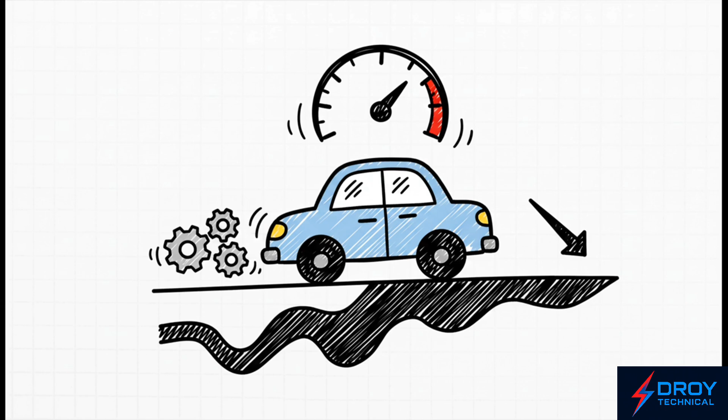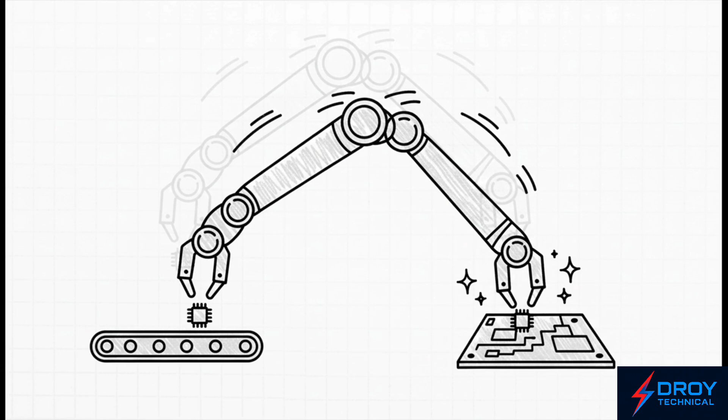Or what about cruise control? You tap a button, and boom, your car holds a rock-steady 65 miles an hour. Doesn't matter if you're going up a hill or down one. It's making these tiny, constant adjustments to the engine, way faster and more precise than you ever could with your foot. And this stuff goes way, way beyond our personal convenience.

You look inside a modern factory, and you've got these robotic arms assembling our gadgets with just incredible speed and precision. They can do thousands of these exact, repetitive movements and never get tired, never make a mistake. And you know what? All of these things are powered by the exact same fundamental principle. And that principle, the big idea for today, is called a control system.

At its heart, a control system does three simple things. It measures something, it compares that measurement to a goal you've set, and then it takes action to get rid of any difference between the two. That's it. Measure, compare, correct. That's the loop that basically runs our modern world.

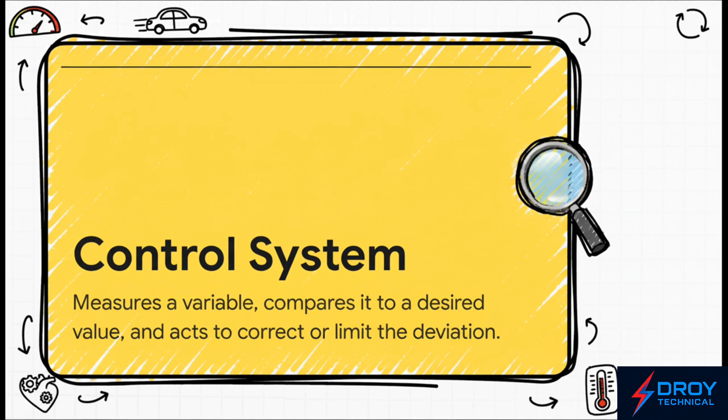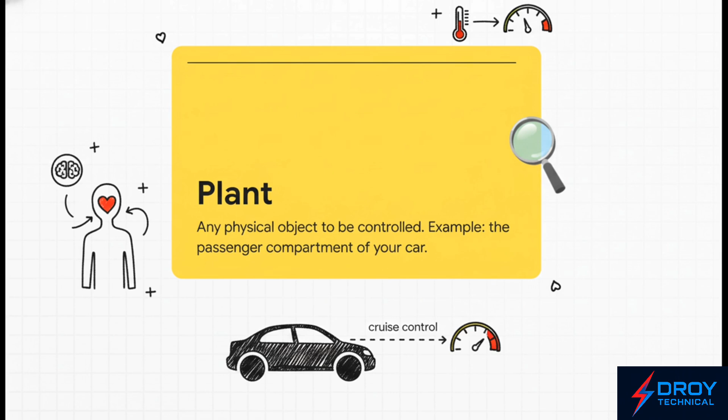Okay, so to really get this, we gotta learn the language. Let's stick with an example we all know and love, the air conditioning in your car. We're gonna use it to break down the 4 key terms you absolutely need to know. First up, we have the plant. Now, in control engineering, this has nothing to do with something green that grows in your garden. The plant is just the physical thing or process we're trying to control. So in our car example, the plant is the passenger cabin. That's the space we want to keep comfortable.

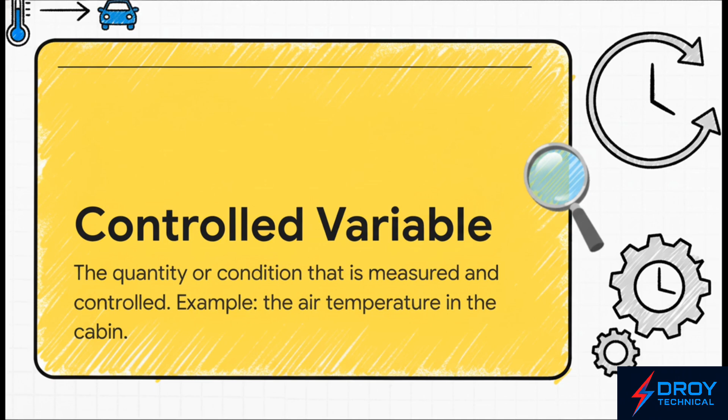Okay, next, what specific thing about the plant are we trying to manage? That, my friends, is the controlled variable. For our car's AC, it's pretty obvious, right? It's the air temperature. That's the one thing the system is constantly measuring.

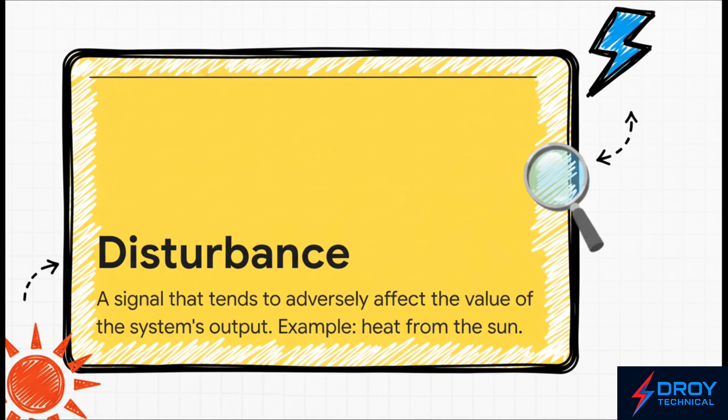Now here's the thing. Nothing ever exists in a perfect little bubble. There are always outside forces trying to mess with our plan. In this world, we call those a disturbance. For our car cabin, the big disturbance, the main enemy, is the sun just beating down on the roof or the hot air outside. That's what the control system is built to fight.

So, how does our system fight back against that enemy, the sun? It uses what's called the manipulated variable. This is its weapon. For our car, that weapon is the flow of cold air blasting from the AC vents. The controller can crank that cold air up or dial it back to perfectly cancel out the disturbance and win the battle for that perfect cool temperature.

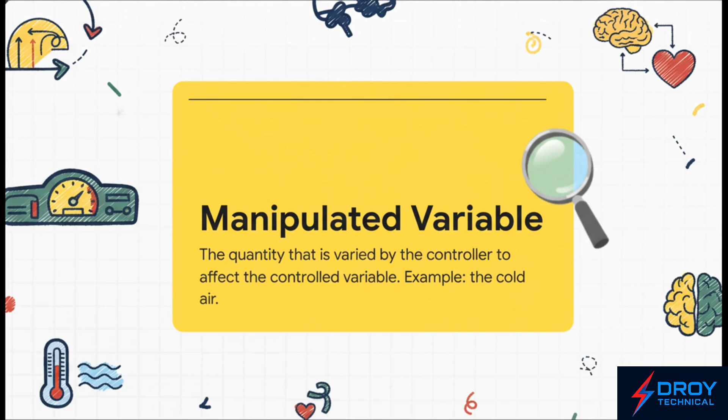All right, now that we have the lingo down, we can talk about the 2 big philosophies of control. And you can really think of it as a choice between a system that is totally aware of its own results and one that is, well, completely blind. So path number 1 is what we call open loop control. This is our blind controller. It just follows a pre-programmed plan and kind of hopes for the best.

A perfect example is a simple washing machine. You set it for a 30-minute cycle, and it's going to run for exactly 30 minutes, period. It has no idea, no clue if the clothes are actually clean at the end. It just follows the timer.

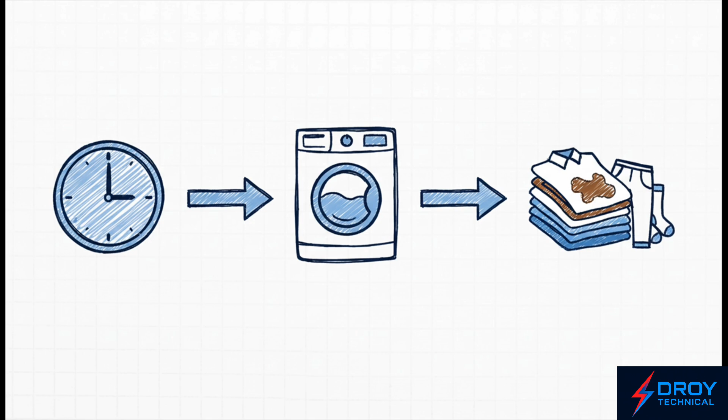It's constantly getting feedback. It's actually measuring the car's speed. So when you hit a hill, a disturbance, it senses the car slowing down and automatically gives the engine more gas to fight back. That's the whole ballgame right there. One is blind to the outcome, the other is literally built to see it and react to it.

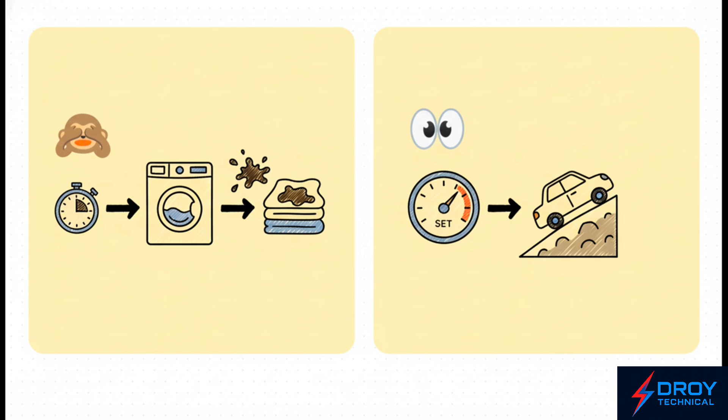So you might be thinking, why would anyone ever choose the blind path? Well, it all comes down to a classic trade-off: simplicity versus accuracy. Open-loop systems are dead simple to build, which makes them cheap. And because they're not constantly trying to fix themselves, they don't have stability issues.

You use them when the thing you're trying to measure is just really hard or expensive to check. I mean, how would you even build a sensor to measure the cleanliness of clothes, right? But their big weakness, of course, is that they can't adapt. They're totally helpless against anything unexpected.

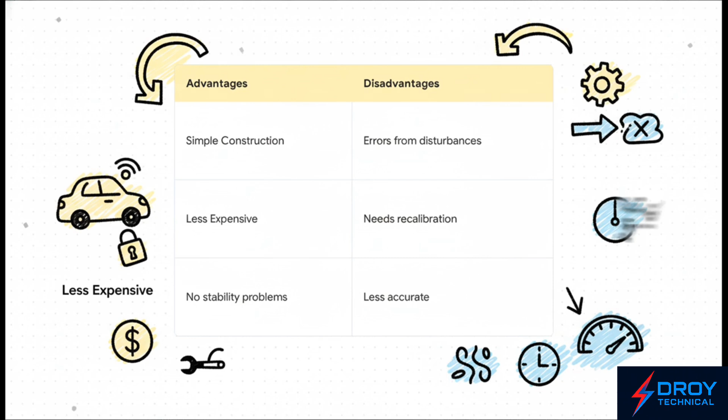You know, this whole idea of an aware system, it feels super modern, but it isn't new at all. In fact, its history is this amazing journey that basically mirrors our own technological story, from the age of steam all the way to the age of software.

It really kicks off back in the 18th century with James Watt's centrifugal governor, an absolutely brilliant mechanical gadget that automatically kept steam engines from running too fast. Then, fast forward to the early 1900s, you have engineers using some serious math to figure out how to make ships steer themselves stably. The 30s and 40s saw huge breakthroughs for things like long-distance phone calls, but the really big shift happened in the 1950s.

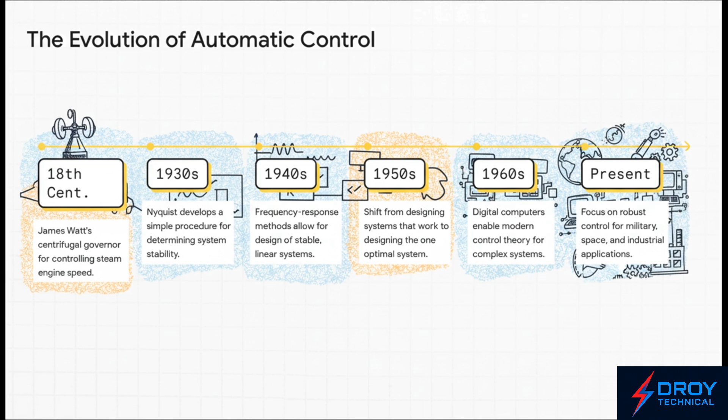We went from just trying to build things that worked to trying to design the single best, most optimal system possible. And then, of course, in the 60s, computers came along and just blew the doors off, leading to modern control theory and letting us manage insanely complex things like the Apollo rockets. And that's what we're still doing today, pushing the limits of robust control for everything from fighter jets to factories.

But here's where it gets really cool. This logic of measure, compare, correct isn't just for machines. Not at all. It's a fundamental pattern of the universe, something you can see everywhere, from the planet itself all the way down to the cells in your own body.

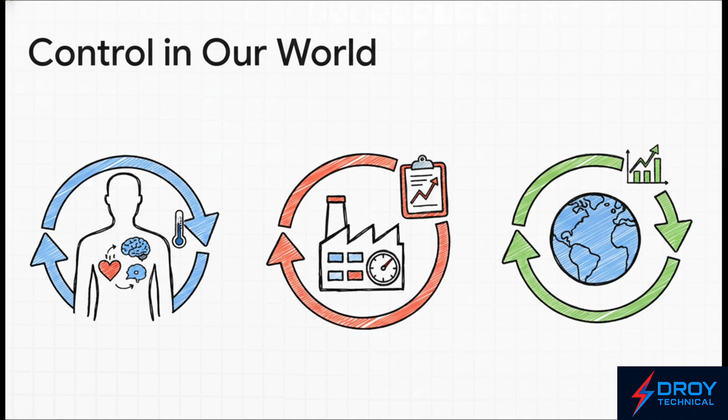I mean, think about it. Your own body is an incredibly advanced closed-loop control system. It uses all this physiological feedback to keep your temperature and blood pressure constant without you ever thinking about it. A good business uses performance reports, that's feedback, to manage its operations and change course when needed. Economists even use these same ideas to try and manage massive dynamic financial systems. It's like this universal blueprint for keeping things in balance in a world that's always changing.

And that brings us to a final, and I think really important question. The power of automatic control is just growing exponentially. We can automate more and more complex, more dynamic, and more critical systems every single day. But just because we can automate something, does it always mean we should?

As these systems take over more and more of our world, maybe the most important question we're going to have to answer is deciding what still needs that human touch. What's the one thing we should choose to never, ever put on autopilot?